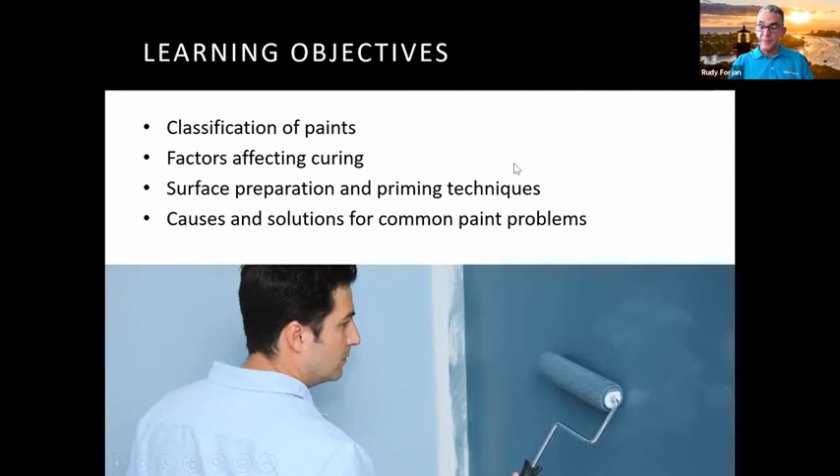All right. So paints are generally classified according to the type of resin they contain. For instance, a latex paint generally contains what is considered a latex resin. For oil-based coatings, alkyd resin is the general term that we use for the most common resin. The mechanism by which each of these coatings dry and cure is very important to know as well. Most of the coatings that you're going to run into in the market today, of course, are latex coatings and oil-based coatings.

But there's a new breed of coatings coming on that's becoming a real big part of what we're using, called waterborne coatings or a waterborne alkyd. We'll get a little bit further into that. And again, how these coatings dry and cure will dictate what product you're going to be using on different substrates and different surfaces. So we classify paint according to the resin or the curing mechanism.

Resin is essentially the glue that holds the pigment in suspension, and it gives the coating its particular characteristics. So if you want scrubbable products or something that's going to be durable, the resin is really going to be what holds it; it's essentially the glue that holds it on. The pigment, or the color, is kind of what it embodies itself.

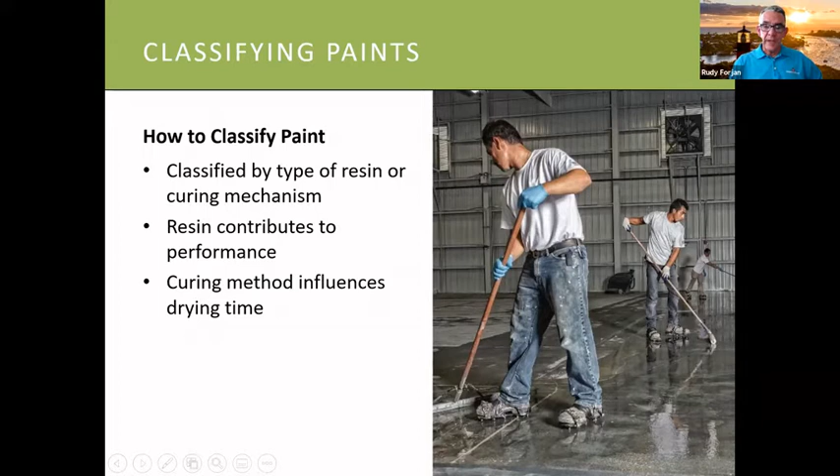Curing, the curing mechanism really determines the dry time, the time it takes for the coatings we're going to be talking about today for the solvent to evaporate from the coating, and then how long it takes for that coating to reach its optimum hardness, which is, again, really critical to know when you're talking about paint and choosing the right paint for your particular situation, especially in South Florida.

And again, waterborne coatings, due to the EPA regulations and EPA laws, are really becoming a big piece of the coatings that you're going to be using in the market. But again, each resin has its advantages and disadvantages. There is no one paint that you could use on any particular surface. In our line, we have close to 4,000 different SKUs. So paint is very customized, very detailed, and we really drill down to the specific conditions that we run into on a daily basis down here.

All right, some of the curing mechanisms that we use. Solvent evaporation, essentially where the solvent that's in the coating itself is going to evaporate. Both oil-based paints and latex paints use that. A lot of urethanes and epoxies do as well, but not to the extent that latex and oil-based paint does. The solvent evaporation gives us the drying time, when you could actually touch the coating itself.

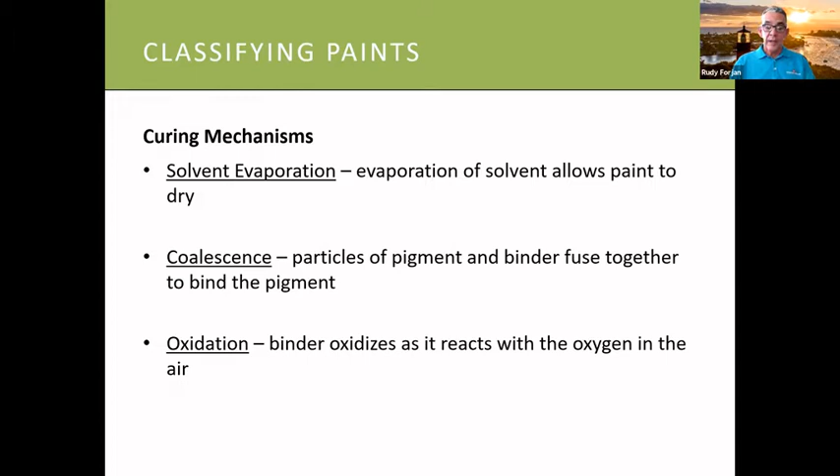Oil-based paints cure by a process called oxidation. They also use solvent evaporation to dry, but as they cure, the binder, the alkyd resin, actually oxidizes and reacts with the oxygen in the air. And those are the curing mechanisms that you run into.

Now, when we're discussing drying versus curing, you've got to understand first that drying is essentially when the solvent is evaporated from the coating, and curing is when the coating is going to reach its optimum hardness and resistance. And there's a big difference between the two. So you have to keep that in mind for how the coating is going to dry, when you're going to be using the coating, and where to use that particular coating, especially in areas where people are going to be around the coatings, especially interior surfaces.

Oil-based paints generally dry in about 4 to 8 hours. They cure generally within 10 days. In a perfect setting, latex paints generally dry in under 4 hours, and anywhere from 30 minutes to an hour at the most in our environment. And latex paints actually take a little bit longer to cure because of that process of coalescence. So that could take up to 30 days.

We're going to talk about the South Florida environment here in just a second. The environment that we live in really extends the curing time on these coatings, sometimes by a factor of 4. So latex paint could actually take up to 120 days, especially here during the summer, to reach its optimum hardness. So those are some of the factors that you really have to take into account when you're painting.

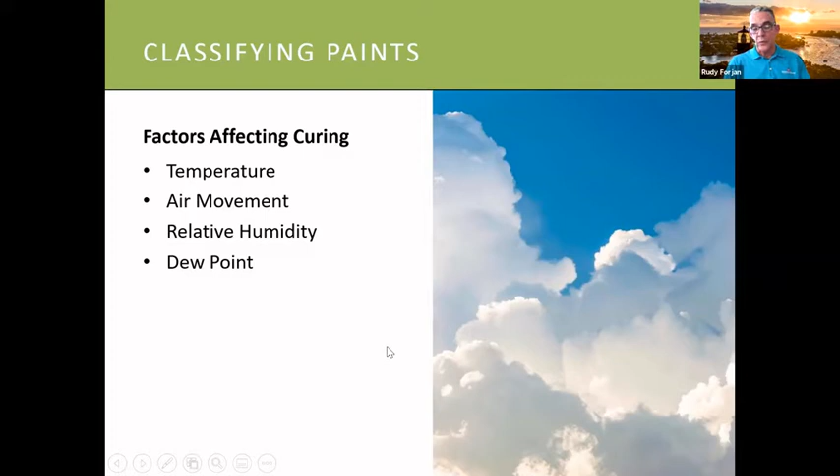So again, temperature with oil-based paints, believe it or not, high temperatures, lower viscosity. And when I say viscosity, kind of how thick or how thin the coating is. So higher temperatures will make oil-based paints a little bit thinner, which is going to make it a lower viscosity. It's going to make it a little bit thicker, a little bit harder to apply. Low temperatures increase the viscosity.

So latex paints, when you have high temperatures, tend to interfere with the bonding or the adhesion of the latex paint. And again, when we get to low temperatures into cooler areas, the low temperatures will affect the curing, where that coalescence process that we're talking about is going to affect that as well. Thankfully, down here in South Florida, with the warm weather, we don't have too much of that issue down here. But again, it's sometimes a factor at least 1 or 2 days a year.

Air movement also affects our curing quite a bit. With oil-based paint, air movement is really going to shorten the drying time, and it's going to remove the odors a lot quicker. But at the same time, when you have these coatings that dry too fast, as what happens with latex paint, if too much air movement, these coatings will result in flash drying. You could get brush marks showing a little bit more on the coating.

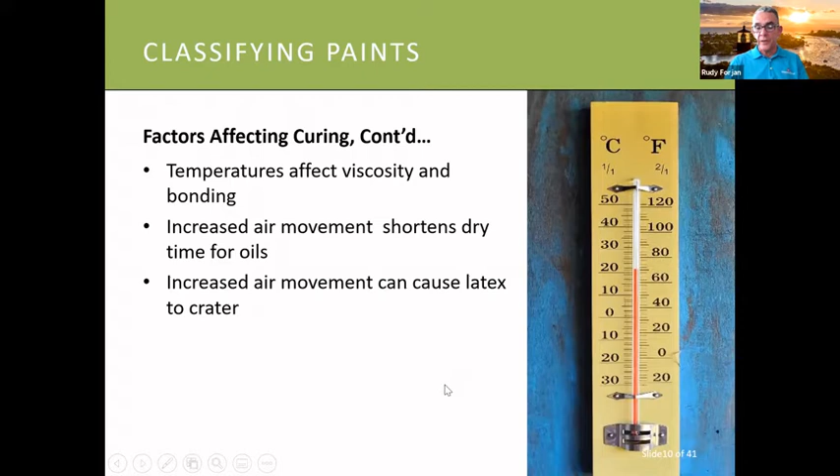Latexes, as we talked about with the dry time, are so short, so they tend to show a little bit more. That's why spraying, especially on the outside finishes, not only because of the efficiency of applying the coating, but the finish itself generally is going to have a much nicer finish when you're using that on there.

Humidity, and that's something that we deal with in South Florida, right? So high humidity could lower the appearance of gloss on oil-based paints, and it could even affect the color, so you have to be a little bit careful on that. High humidity might slow down the drying time of latex paint. So you have to be, again, cognizant of that fact, although with the temperature differences that we have here and the high humidity levels, our coatings work real well. Low humidity also, because the coating dries too fast, can cause some poor surface adhesion with latex paint, but generally down here, we don't have that much of an issue with it.

Dew point is a real big piece that we have to deal with down in South Florida. When we talk about dew point, we're talking about the temperature of the air, if the temperature of the substrate is lower than the dew point of the air. In other words, the presence of moisture will affect adhesion.

For instance, if you fill up a glass of water and put some ice in it, the sweating that you're going to get on the outside of it, if you get that kind of sweating on coatings and so forth, it can affect adhesion, it can affect dry time, color, and especially with oil-based paints, it can affect gloss itself. It happens with both coatings.

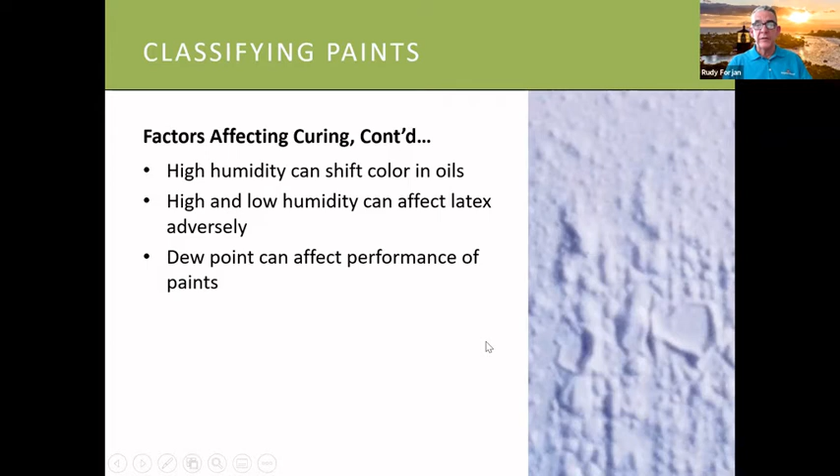Hey, Rudy, I got a question. Jeff Green wants to know, at what point in hours does rain not affect freshly applied paint on a masonry surface? Good question. At what point in the day is rain going to affect freshly applied paint on surfaces?

Good question. When you're using latex paint on the outside, especially on the walls, you're looking at about an hour to an hour and a half before it rains without it affecting the coating itself. Oil-based paints, because they take a little bit longer to dry, are not going to dissolve in water, but the rain falling on there can affect the gloss and the appearance of the coating itself.

And you're going to find that most of the coatings used in South Florida outside, and we'll get into the reasons a little bit later in the presentation, where rain is going to affect it are latex coatings from any manufacturer.

I got some warranty questions. Are you going to be going over warranties, or do you want to handle those now? Let's do that a little bit later. Okay. I guess we're going to be talking about surface prep and so forth, and we'll go from there. Okay. Excellent. Thank you. Not a problem.

Okay. Surface preparation. This is, again, the key. When you hire premium contractors like Munyan Painting, the most important part of any paint job is the preparation that you're going to be doing. Using the correct surface preparation, and also using the right coatings to prime with. I'd rather have a properly prepared job with a cheaper coating than an improperly prepared job with a premium coating. Preparation is the key.

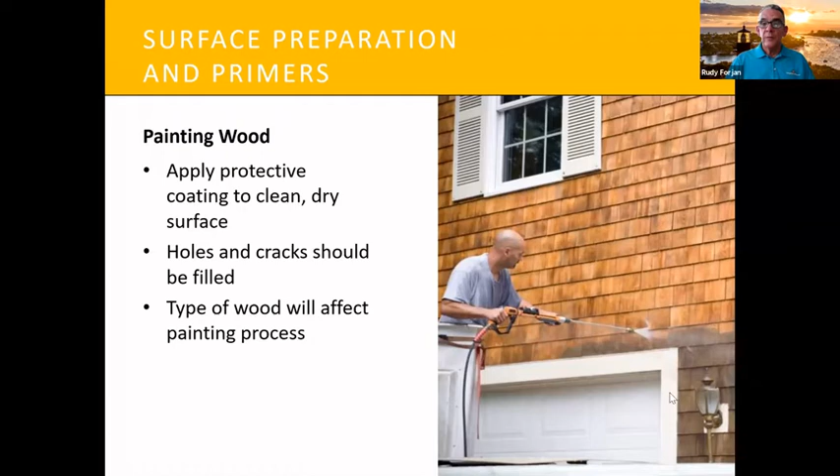Okay, painting wood. Essentially, when you're staining wood itself, you have to make sure it's clean and dry. Thankfully, in South Florida, we don't have a lot of staining itself. The one thing is when you're painting or staining pressure treated wood, and we have a lot of that down here. If you do that, you've got to not only let the wood dry, you've got to let the chemical that's used in pressure treated lumber

kind of wear out a little bit, because pressure treated lumber is made to keep water out, but it also keeps paint from penetrating in for adhesion. So a little quick test you could do on that: if you want to paint pressure treated lumber, take a spray bottle, fill it up with water, spray it on the wood, and if the water beads up, like when you just freshly wax your car, and runs off, you're not going to get any paint to adhere to that. So the best thing to do is to wait and give it some time.

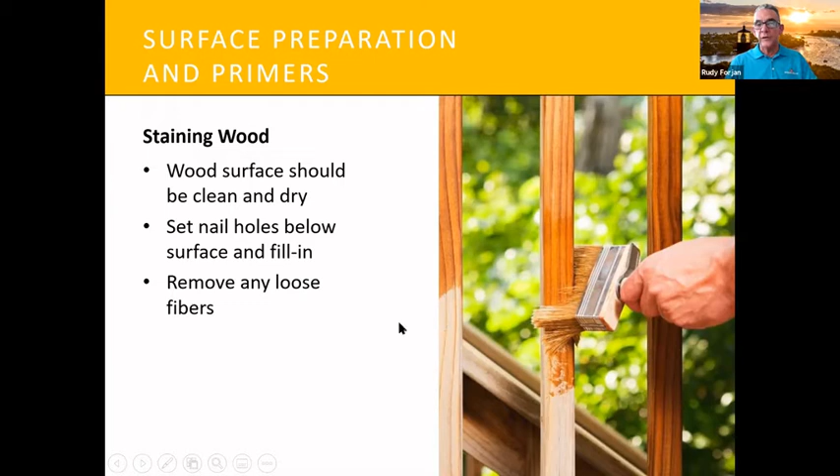So again, staining, we don't have a lot here, but removing loose fibers and getting nails below the surface are really the biggest thing. A lot of questions we have are with restaining wood. A lot of woods have a finish on there, like a varnish, like in this instance, a door or window. If you put stain on top of a coating that's already on there, the stain is made to penetrate into the wood to give it color. If you do not remove the clear coat that's on there, stain is not going to work properly, and you're going to get a very blotchy looking surface.

So the way to do it is to remove as much of the coating as possible. If you have a lot of discoloration on the wood, you could use a wood bleach system to make the wood all one consistent color. And different types of wood will absorb stain differently, and it's going to make it look completely different. So that's something you have to keep in mind.

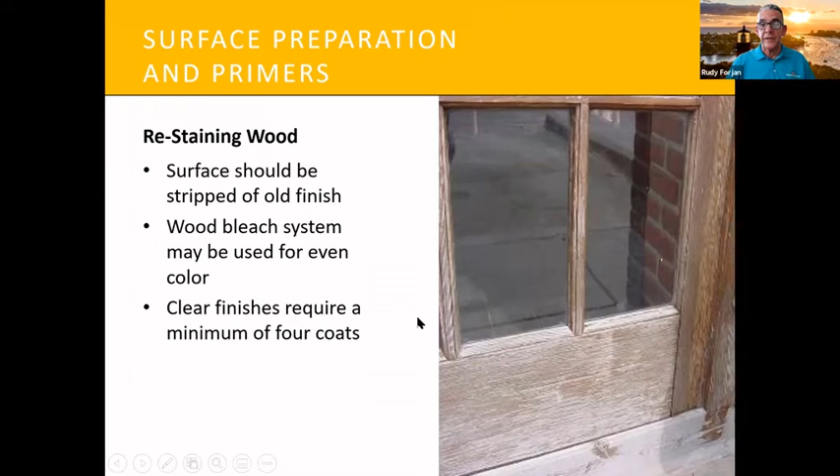Masonry, that's nothing that we see down in South Florida, correct? That's never around down here. With masonry, we're talking about everything from precast concrete, concrete masonry, cinder block. Stucco is the most prevalent thing. Another part that we have to take into consideration is EIFS. That's a plaster type system, a thin sheet of plaster that's applied over top of styrofoam, and it's easy to do a lot of decorations with it. So we have to take that into consideration.

The biggest issue when you're dealing with concrete is you have to take into consideration the porosity of the surface that you're painting, and then the pH levels of the surface itself. All concrete contains pH. When you have a curing period of 30 days when masonry is applied, you're trying to allow that water to come out, because of the alkali or pH inside any concrete type of finish. If you have water inside masonry, as it dries up, it's going to solubilize whatever pH or alkali is in the concrete. And if you put paint on top of that surface, as that moisture comes through, latex paints are breathable.

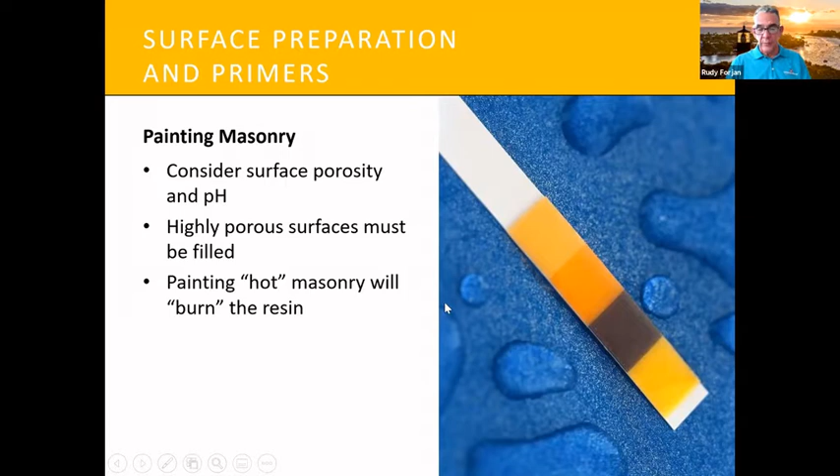So, painting metal. Before that, let me interrupt you real quick. There was a question about wood staining: should you or could you apply a sealer coat on wood before staining? No, you don't want to do it before. You would want to do that afterwards. If you seal the wood, the stain can't absorb into the wood. Stain doesn't lay on top like paint; it absorbs into it. So you want that wood as porous as possible for the stain to do its job. If you're going to put any sealer on, do it after the stain. Thank you. All right. Painting metal.

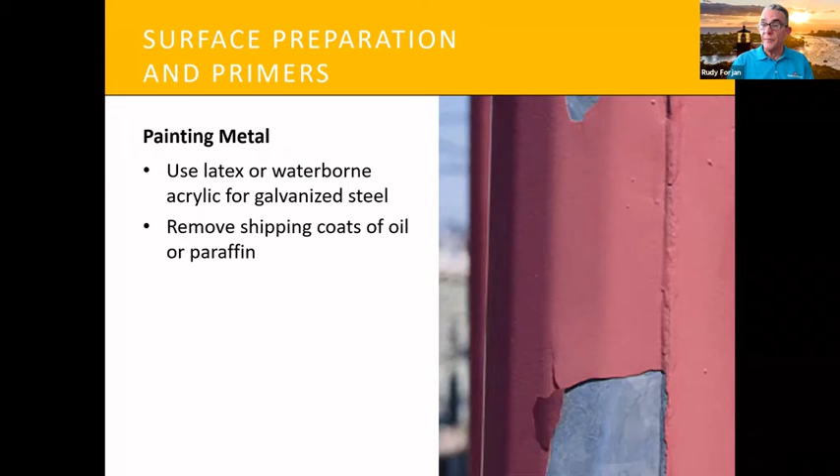Again, there are too many things to look at here, but the biggest issue you have, especially when painting new metal, is that there's usually a shipping oil or manufacturing oil on it. You've got to make sure that metal is clean. Galvanized metals cannot take oil-based paints on top, because there will be an issue with what we call saponification that will cause a lack of adhesion. As you can see, there are just so many things that can happen in surface prep. Talk to your manufacturer's rep, talk to your painting contractor, and get the information on how to prepare surfaces. That is key to any good paint job. And especially if you're spending money on a big property, do the inspection to make sure everybody is actually doing it properly.

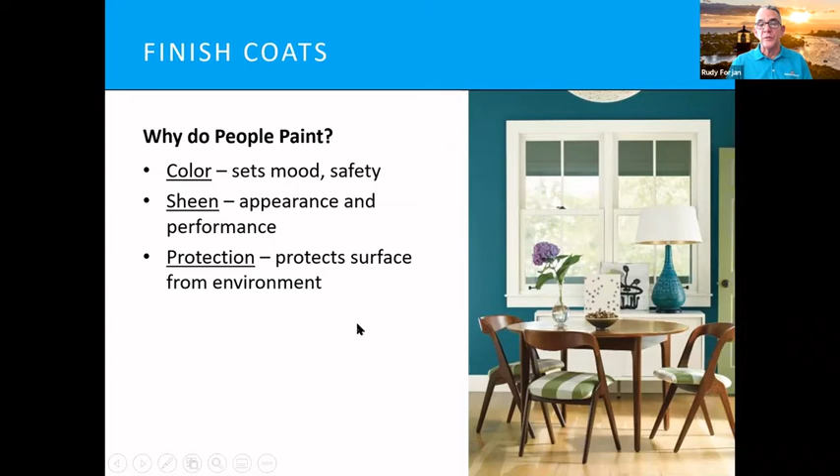So let's talk a little bit about why people paint. We all know why people paint. We talk about color; it sets a mood. Color also gives the appearance of a building, and it will raise the value of your property. The sheen level is important as well, because it gives you the performance characteristics of the product itself. But the biggest part for me, especially in the area we live in, is protection. Even inside surfaces, all building materials are made to have a coating applied to them. So if you don't have a proper coating, or have an improper coating, or wait too long, you can have some issues. So you want to make sure you're using it correctly.

I've seen people move out of their units because the building is not done right. I've seen jobs delayed for 3, 4, 5 years because there's no agreement on color. So you really need to understand that. But you have to factor that in with, some colors don't work as well outside as others. Some colors have certain limitations. So you have to kind of look at that itself. Again, designers go to school for this, they get degrees on this. So it's not simple when you're picking colors.

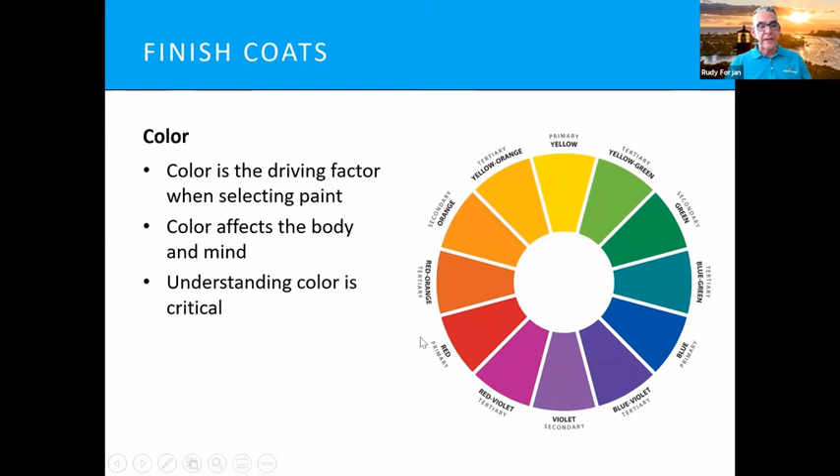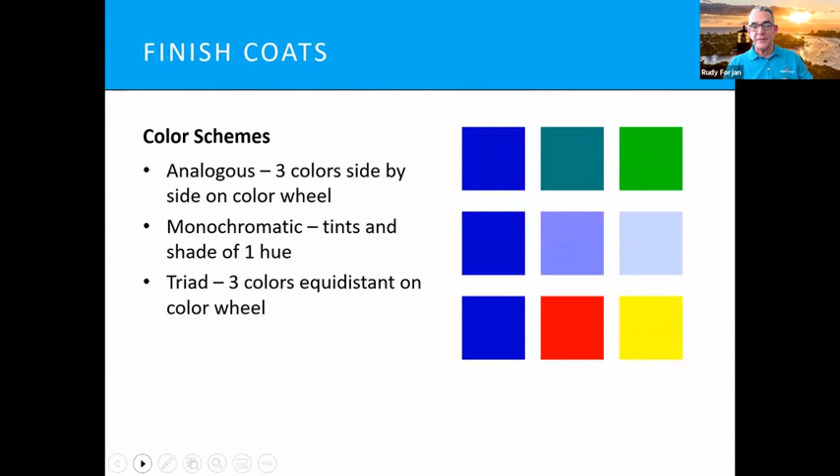So you could use the analogous type of color schemes, monochromatic, or using different shades of one color, or equidistant, or the triad, basically using colors across from each other. These are generally more dramatic. They catch a lot more attention. If you pay attention to the color wheel, you'll find that a lot of our sports teams use triad color schemes on purpose because it attracts a lot of attention. It helps sell the products and make the team a little bit more important.

Sheen level, very important to discuss sheen level itself. We have sheen levels that go from flat all the way to high gloss. Sheen levels have a reason, what they're good for. They have some attributes to it. And you really have to use this to influence what kind of coating or finish that you're going to use. Generally, glossy coatings will give you more durability and washability, especially if you need it for aesthetic reasons. However, high gloss coatings will tend to accentuate surface defects, and it's going to show imperfections a little bit more.

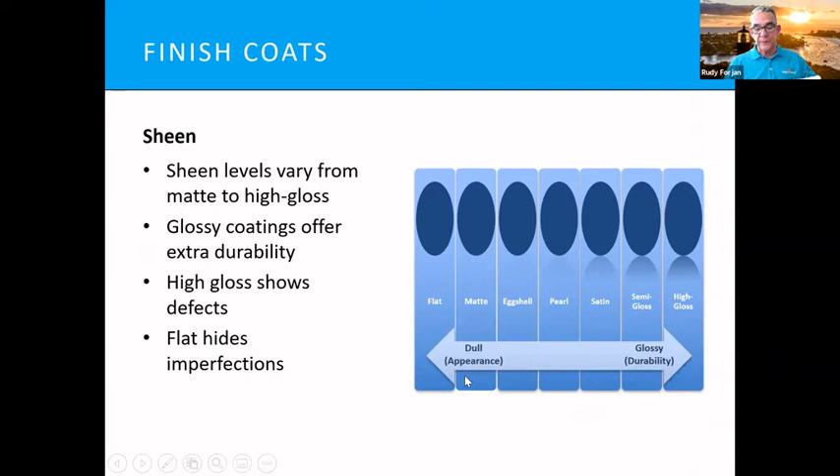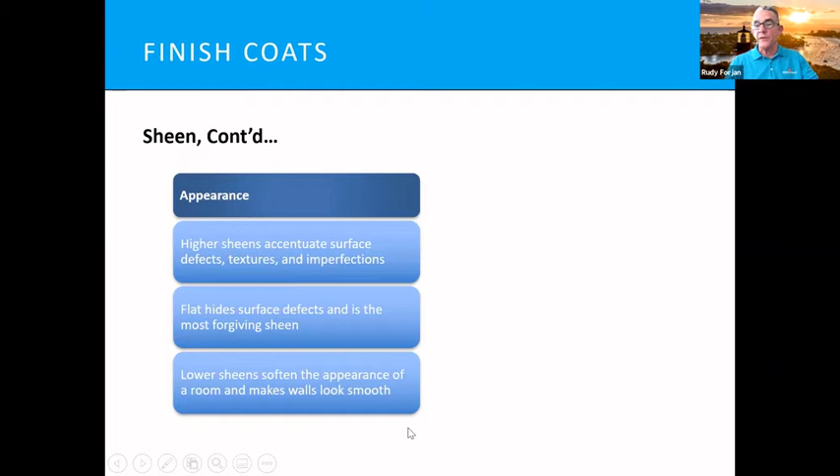While flat paint, you won't see that as much, but at the same time, if you need a surface that's scrubbable, you really need to stay away from flat finish because it will show everything. And that's why you have so many different sheen levels in between. Let's give you a little bit more idea about sheen level itself. Higher sheens tend to accentuate surface defects like we spoke about. Flat surfaces, they look more elegant. They're going to hide surface defects, and it is the most forgiving sheen. Lower sheens soften the appearance, and there's the different levels in between, and makes the wall look a little bit smooth, a little bit more elegant.

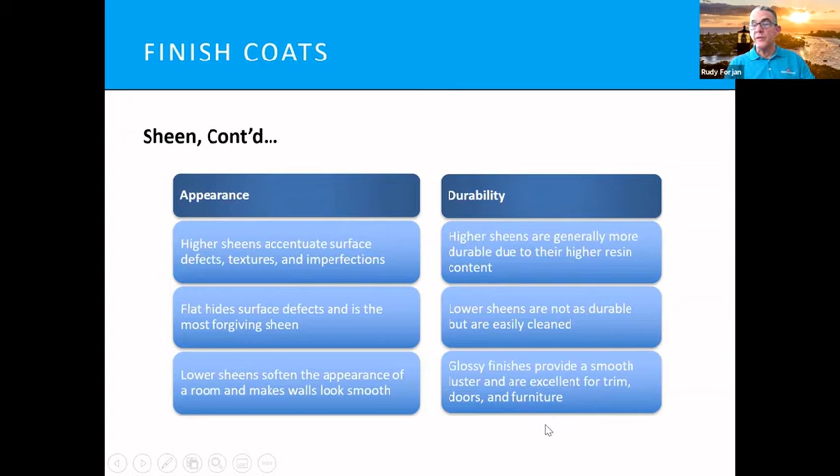However, if you're looking for durability, higher sheens are going to be a better product to use because the higher resin content makes it a little bit more durable and washable. Lower sheens, they're going to be not as durable, but they're going to be easily cleaned. So you could use a combination of both of them. And again, glossy finishes provide an excellent finish for smooth luster, and that's why they're generally used on doors and trim and so forth, because that's what gets the most abuse. So we talked about that.

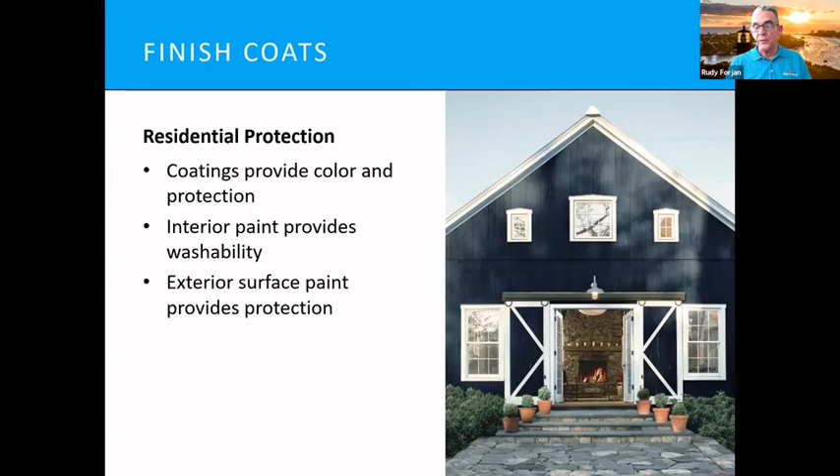And then protection. Again, I've talked a lot about the surface protection itself, and the surface protection is really kind of the key to any kind of coating system you have on there. But you're not going to protect the concrete or the wood or the metal if that surface is not prepared right. So you have to make sure that the surface is being done right. Commercial protection, again, we talked about the fact that there's 4,000 different SKUs I have in my line alone.

And again, a lot of that is just to offer in whatever particular system that you go into. You have to use the right coating for the right surface in the right environment that you're going to be using it in. So you have to make sure that, for instance, if you're going to need any type of chemical resistance or abuse resistance, you have to kind of limit the coatings that you're using on there. And again, it's an important component of facilities maintenance, or even on your properties.

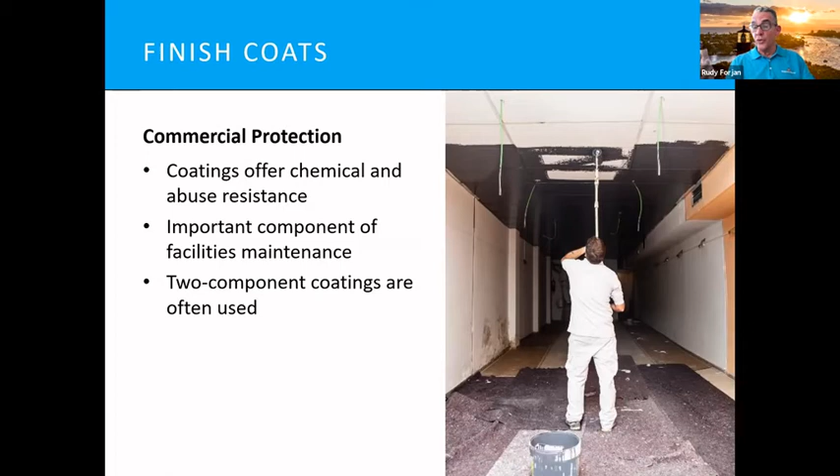Specialty protection, again, these type of things, I'm going to speed up a little bit through there because I want to get to some of the other systems itself. But again, there's different reasons, like for instance, spray applications or low VOC and splatter resistance and durability. All these will help us determine what kind of coating to recommend for you.

And whenever you paint, we go in there and we interview, we want to be able to know what's important to your particular facility or your particular condition to be able to give you the best value for what you're looking at. And again, everything is dictated by cost. So we try to balance everything out to build a system that works for you.

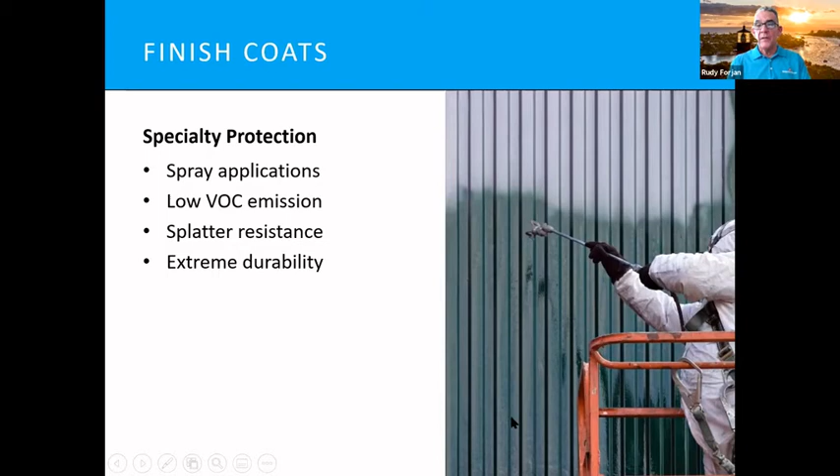And that's what I wanted to kind of end this segment with is, what is a coating system? Essentially, we take all those factors that we talked about before. We'll talk about what is important for your community, what's important for your facility, what are the conditions of your facility at that time. We also want to know when you're going to be painting. For instance, in a building or an HOA, how many people are going to be around. All these kind of things really factor into choosing the right coating, and to build that system to be able to do it right.

And when you're building a system, one of the things that as manufacturers we do is that we'll build a system for you along with a coatings or preparation system. We do specifications, and part of the inspection process that I do, especially when you're doing a building outside, is to make sure that the contractor you've chosen is following those specifications, following the coating system, and then we can identify the areas before they become an issue.

Rudy and I are having right now an issue ourselves on a particular building. It's being painted, and we're trying to give the information to the owner of the building. All we could do is give the information to the owner, and hopefully the owner will be able to understand. But again, a lot of this system with the specifications leads to warranty. So Rudy, do you want to ask that question now about the warranty questions that you were having?

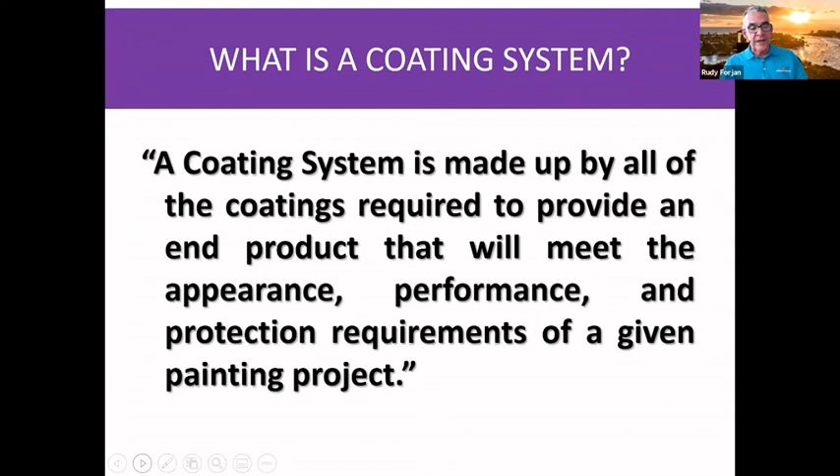All right. I know I'm kind of short on time. I've got some issues to talk about problem solving, but I'm going to kind of skip through these things because I know I'm really short of time. I want to give Carmelo his time, but these are some of the more common issues that you're going to run into.

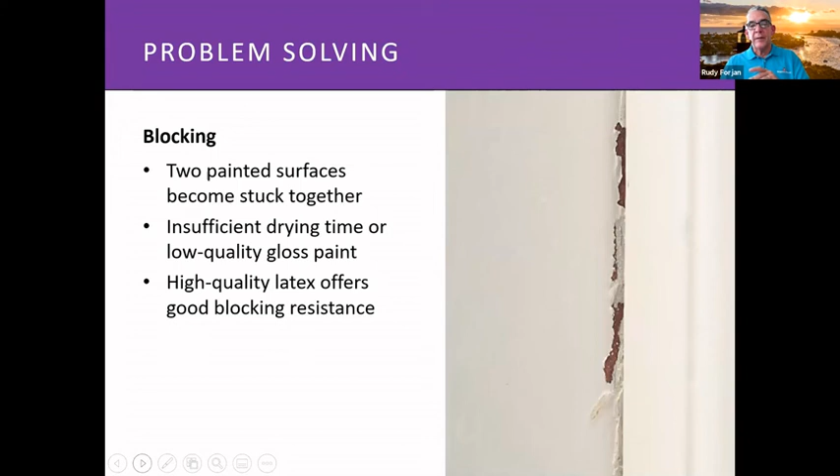Blocking is basically when latex paint sticks to each other. There's a solution to that, and you could call me and I'll tell you. Oil-based paints tend to yellow, especially when you're using whites. Oil-based paints, even if they say they're anti-yellowing, will yellow with age and time. So you have to keep that in mind. Latex paints generally do not.

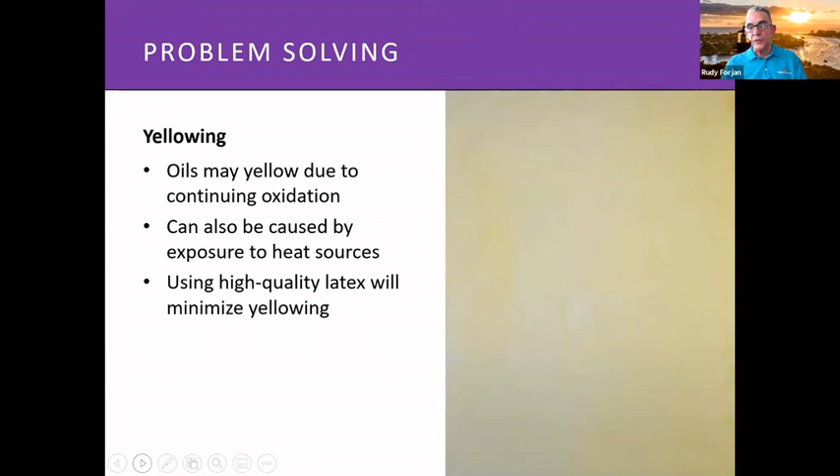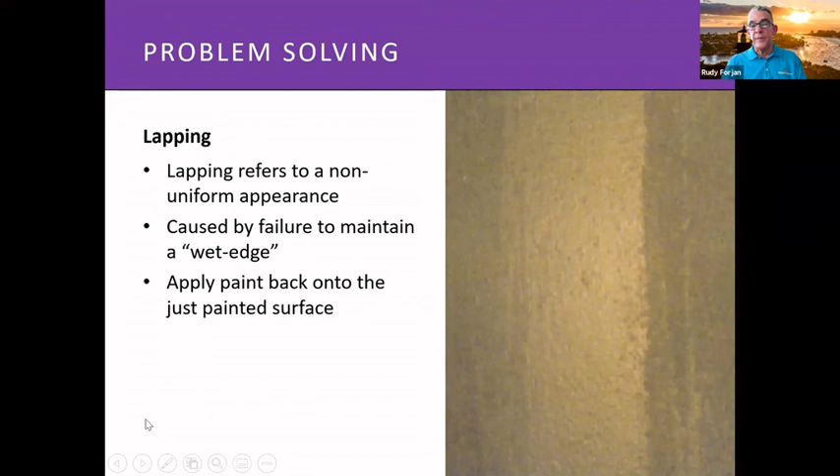Lapping is when you start seeing roller marks or brush marks or one area shinier than the other. That could come from the wrong amount of paint being put onto the surface, a porous surface, or maybe something not being sealed correctly.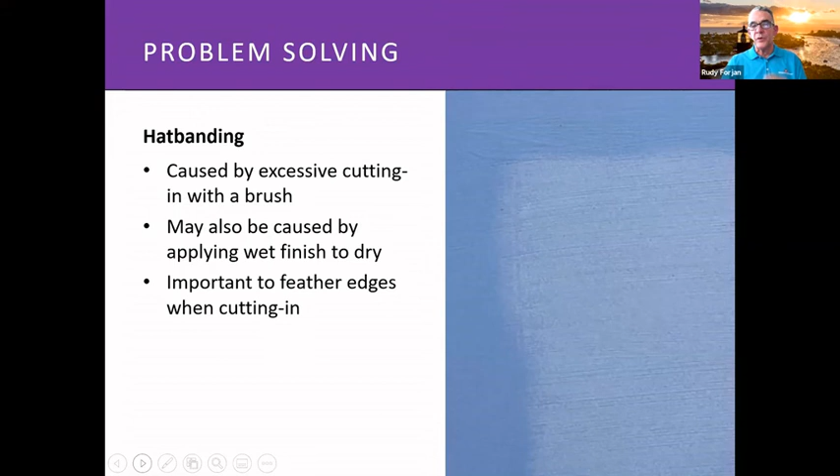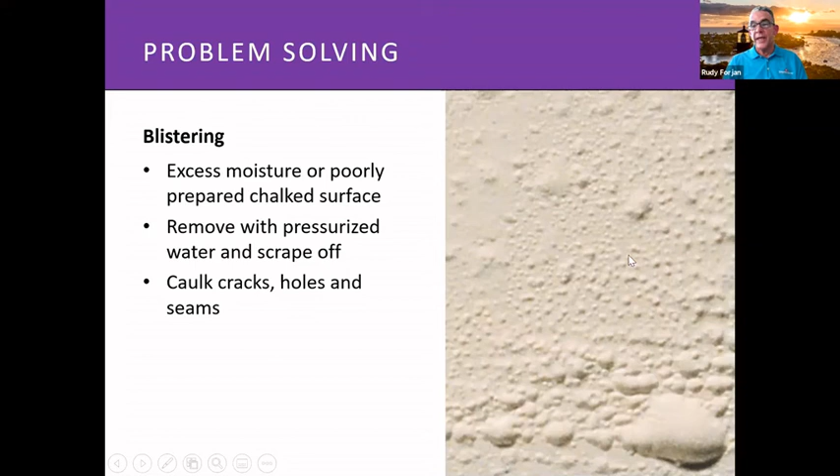Sagging: you apply too much paint, or you paint when the surfaces are too hot. Blistering, we talked a little bit about that. You paint on top of a chalky surface with concrete, you'll get a lot of blistering. But a lot of times when you get that, you'll see that moisture is generally the culprit.

Chalking is normal in exterior paint. It's not part of any warranty. That's why I say read the warranty itself. We can explain as we're going through the process of recommending the right coating why paint chalks and why a shinier paint tends to chalk less than a flat paint, generally because of the amount of resin in there.

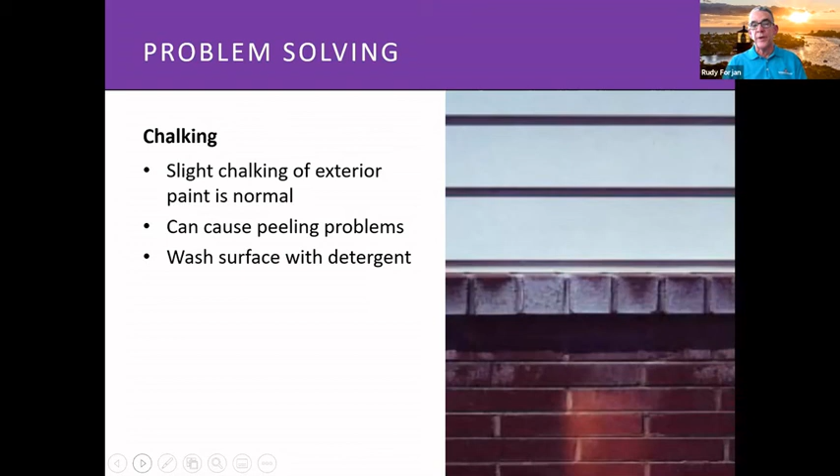It says to wash the surface with detergent. You really need to not only do that, but on the outside you want to power wash, and you want to use a sealer to seal whatever chalk residue is left after power washing. Mildew, biggest problem we have in South Florida.

No one guarantees mildew-proof paint. No manufacturer. Don't let anybody fool you. I live in a community with a lot of oak trees. If I leave my car parked outside during the summer, even for 2 or 3 days, you get mildew forming on the roof of the car. Mildew grows everywhere, generally on dirt; it doesn't grow on the coating itself.

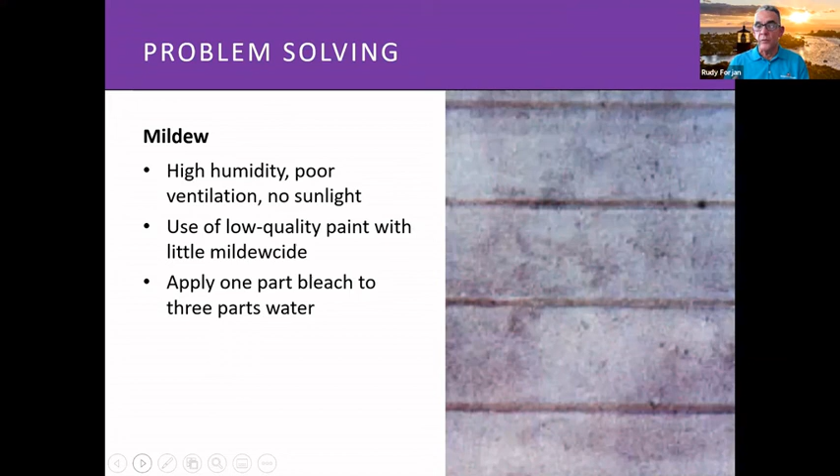Sanitize any kind of surface that you're using. The most common method is a bleach and water solution, and you really have to vary that. 1 part bleach to 3 parts water sometimes doesn't work because, to lower the cost, they sometimes dilute the bleach to begin with. So you have to work with it. There are some biodegradable cleaners being used nowadays that you could use.

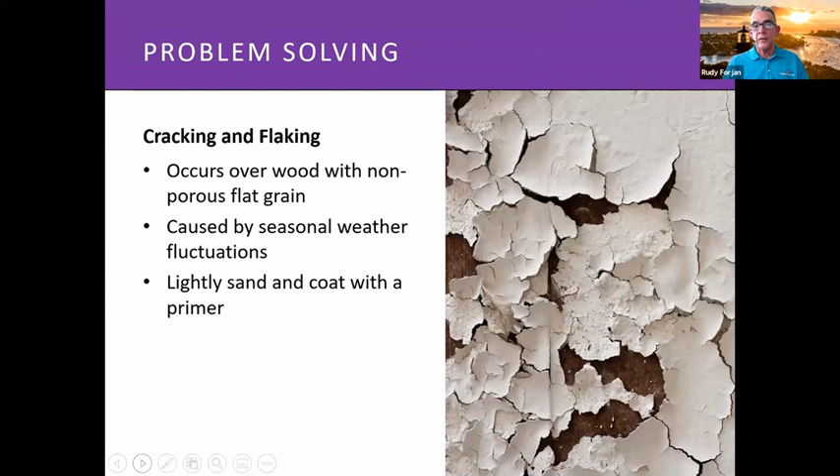Cracking and flaking is usually due to improper preparation, or the lack of sanding or preparation on the surface itself. Tannic staining, we talked about when we were talking about wood.

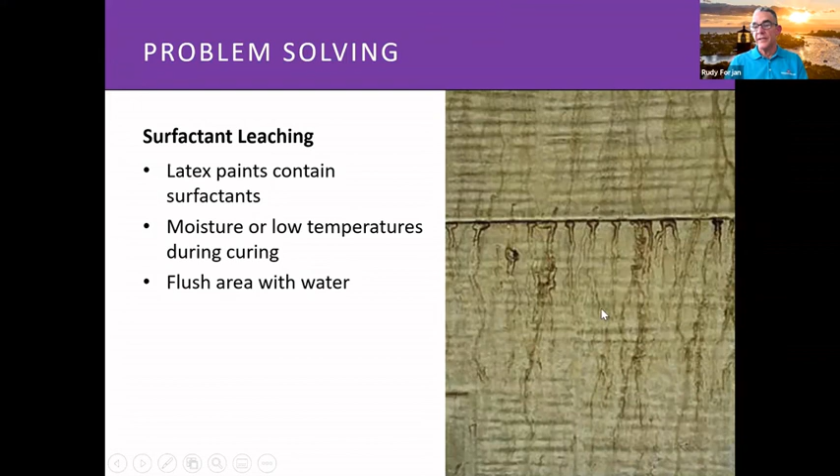Surfactants are generally chemicals used in latex paints to let everything mix together. If you paint a surface outside and it gets a little bit of dew or water on there and it doesn't wash off with the rain, it can bring out those surfactants and make it look like it's staining like this. A lot of times, on a flat paint especially, you'll see a shiny finish.

So when I'm looking at a complaint, what are the questions I ask? It's probably like working as an investigator on a cold case, trying to figure out what it is.

Where's the location of the surface? What kind of surface prep was used on there? When was the surface painted? The atmospheric conditions. And nowadays you could Google a particular day in 2018: what was the weather that day? So you'd be able to determine that, and how the product was applied.

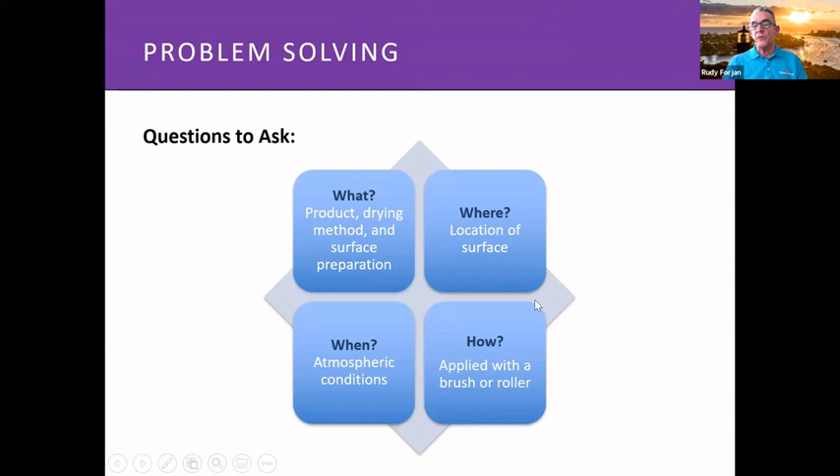So generally, those are the questions that I ask, and you figure out, quite honestly, when you're fixing complaints or when there's an issue, and I'm not saying this because I'm a manufacturer, 90 to 95% of any coating failure happens because of the lack of the preparation method being used or the substrate being used. That's usually what caused any kind of issues with paints itself. Paints are generally easy. They're not difficult to make. There's no secret in making paints.

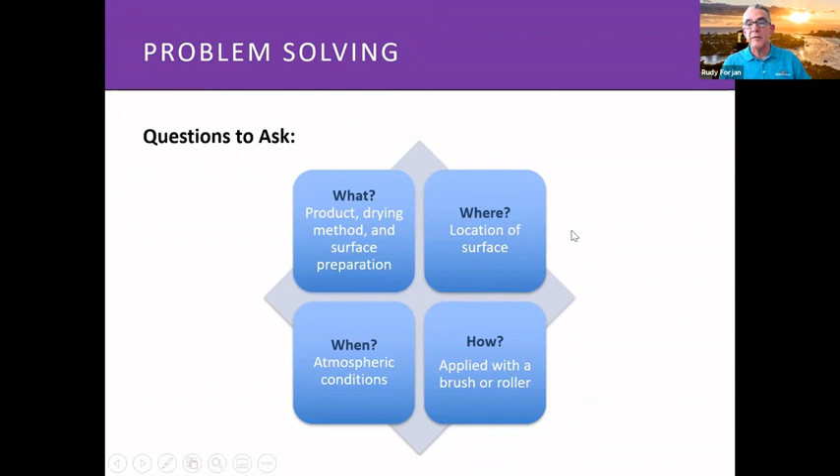So you really have to make sure that when we have a problem, and if you're able to recognize problems before the job starts, you're going to have a much more successful job. So again, that's really the end of my presentation.